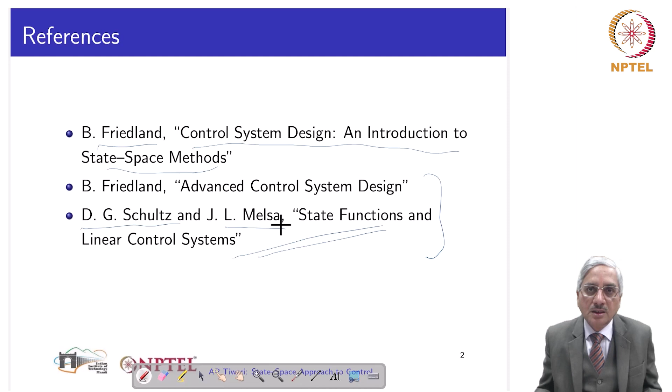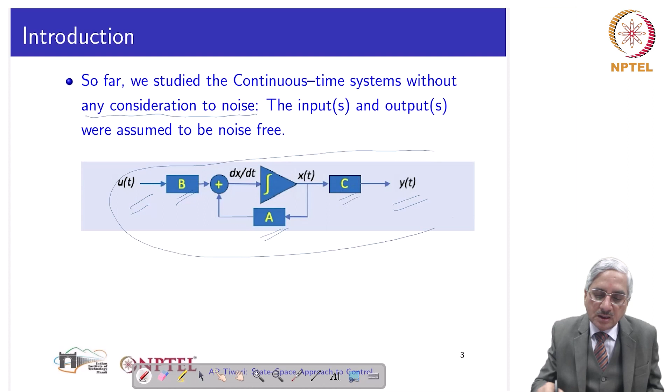So, as I said in the beginning, we studied the continuous time systems so far without any consideration to noise. The inputs which are coming to the system and the outputs which are coming out of the system, both of these were assumed to be noise free. No consideration was given, and even though the matrices A, B, C in the state space model utilize this form, nowhere do we see any noise.

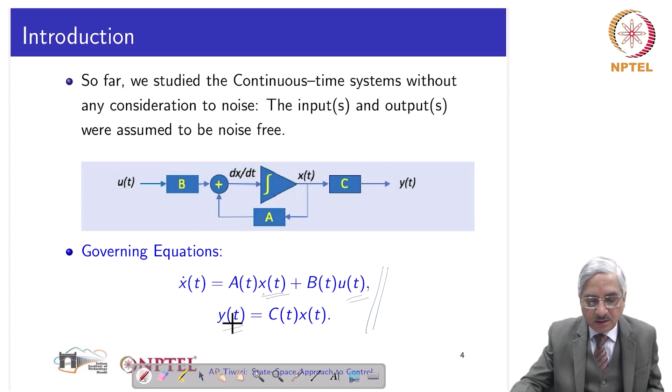And with that, these were the equations we used. So everything is quite deterministic in nature. This system state, system input and system output, they have been studied in a pure noise-free environment.

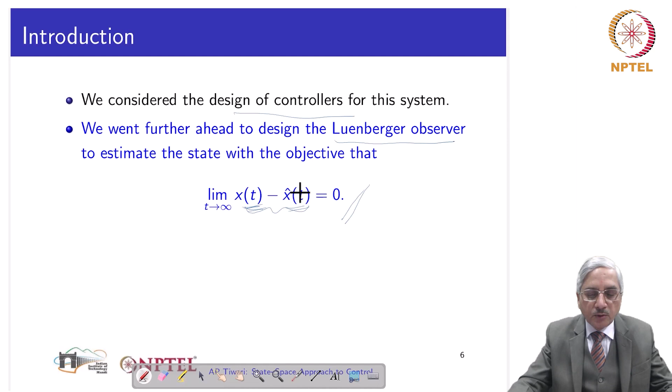We designed controllers, and then somewhere in the design of a state feedback controller, we realized that to implement a state feedback controller, we require states, and not all the states are accessible or they are not measured for reasons of economy, installation, etc. So a respite came that the Luenberger observer is capable of estimating the states, and the objective function in that estimates the states with this objective: that when time t tends to infinity, the deviation of estimated state from the actual state, or this error, will be small. With this objective, we learned the Luenberger observer, and we went on.

We studied the separation principle, which established that when we use the estimated states from the Luenberger observer in place of the actual system states, we get the stability and performance as we would have with actual states, except for some initial time during which the states of the observer converge to the system states. After that, the performance of the system is as good as the performance that would result with the feedback of actual states of the system.

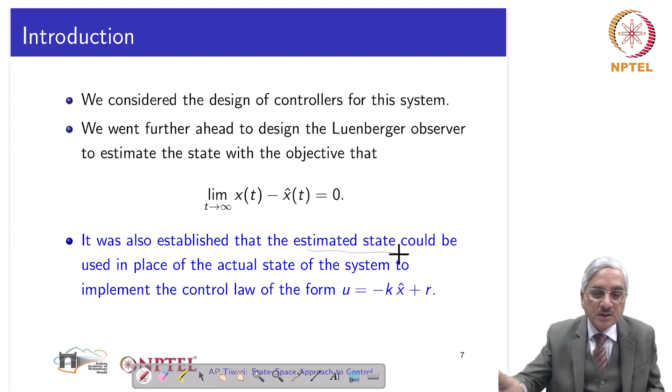Then we also established that the two things, the design of the control and the design of the observer, could be carried out independent of each other, and the overall system with state feedback controller designed separately and observer designed separately, when brought together in realization, would be stable. This is what we established. We utilize that even for Kalman filter.

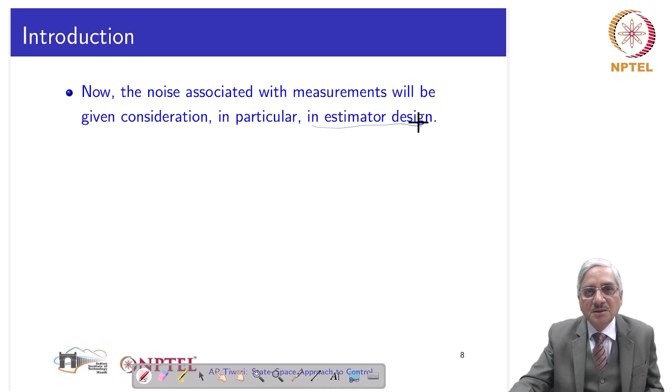Now we are at the point where we actually consider the noise associated with measurements. And here, in the estimator design, of course not in modeling, etc., we are not going back, only in the estimator design. So basically, the design of a state estimator, which we will be learning now, depends upon probabilistic data concerning the noise. Probabilistic data will consist of the average and the covariance, etc.

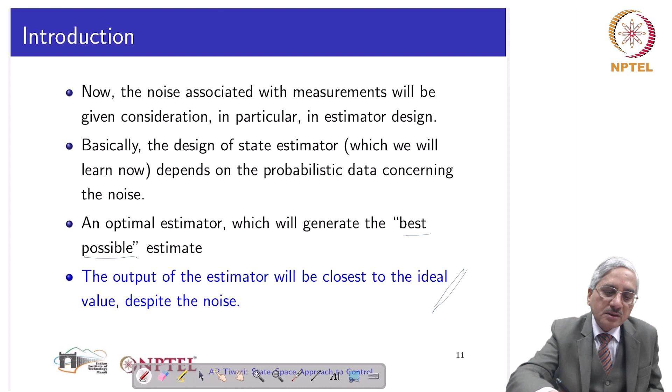And we will design an optimal estimator which will generate the estimate of states that is best possible with the given noise statistics. That is the beauty. And this is the meaning of the best estimate: that the output of the estimator will be closest to the ideal value despite the presence of the noise, despite the noise corrupting the system characteristics.

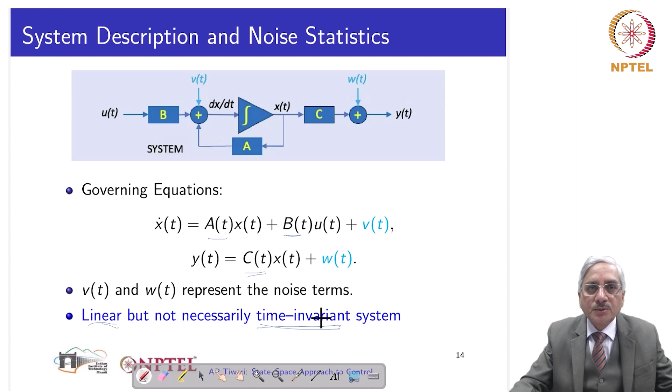Now, first we see whether you call it properties or assumptions. So the noise which we can handle through Kalman filtering should have these properties. First thing is that it should be additive, as I told earlier, both adding one to the input and one to the output. So both are additive in nature, and there are only two forms of noise considered, the Vt and the Wt, the input noise and the output noise.

And the additional property they should have is that both of them are white noise. Now, of course, one should study literature to understand what is white noise, but here is a short explanation: the value of the noise at one time instant is not at all related to the value of the noise at some other time instant. In that sense, it is called white. Generally, if we see over a long time, it will contain almost all frequency components.

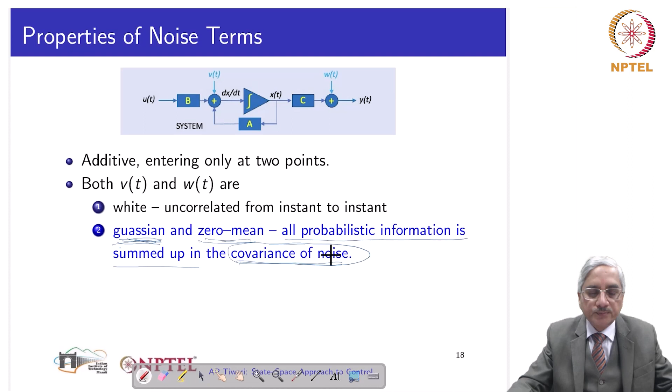The other assumption about both noise terms Vt and Wt is that both of them are Gaussian and zero mean. Now, what this means, especially because of Gaussian, is that all probabilistic information is summed up only in the covariance of the noise. We need not go for higher moments. The covariance, the second order moment, is good enough to characterize the noise. So Vt and Wt, with this assumption that they are Gaussian and zero mean -- zero mean means the average taken over some time will be zero, and Gaussian means the characteristic of the noise is fully represented by its covariance. Mathematically, it is like this: the expectation of Vt into Vt transpose is a Q matrix.

This V is a vector, mind it, because it is entering at input terminals. It has the same dimension as B times U. And U is, let us say, M inputs are there.

This B is multiplying to U, and to that Vt is adding. So it has the same dimension as that of Bu. And Bu is a column vector, so Vt is also a column vector of the same dimension as Bu, which is of the same dimension as Ax, which is of the same dimension as x dot, or n.

So this Vt has dimension n. And so Vt Vt transpose will be a matrix, and its expectation, that covariance, is a matrix Q. And we assume that it is positive semi-definite.

The output noise Wt again has the same size as Cx. It is again a vector of dimension p if the output is p dimensional. So it is a matrix R, and our assumption about this, we'll see subsequently in derivations it will be visible, is that R inverse is to be evaluated, and so R must be positive definite.

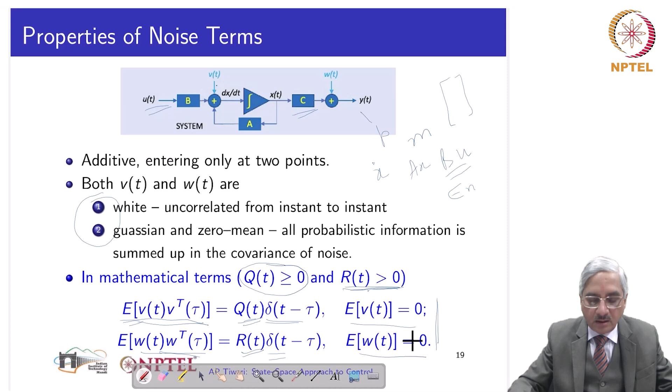So these are the mathematical characterizations of these properties of Vt and Wt. Covariance is Q. They are uncorrelated from time to time, so that is why this delta. They are zero mean, so that is this. Now they are uncorrelated to each other, so this will be zero for all time, t and tau, for any time.

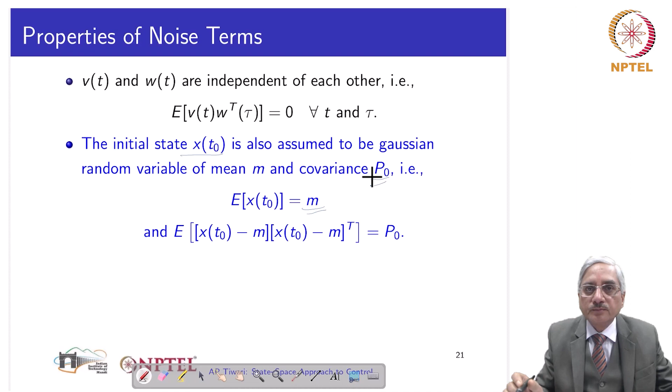And the initial state of the system is assumed to have a mean m and covariance p0. So let us interpret this a bit. So xt0 - now let us first consider a single state variable, which with time will have some, let us say, this kind of variation.

And then we are considering at t0. So at t0, when we do it in the deterministic sense, there is no noise, nothing, then we know the state is here - this is xt0. We are considering one of the states, so let us say xi. Now when we say that it is containing noise and its expectation is m, so of course this is m.

But then what it means is that it could be little more or it could be little less, and this band is something which is very random. However, the mean is here, and around that, its covariance, which is p0.

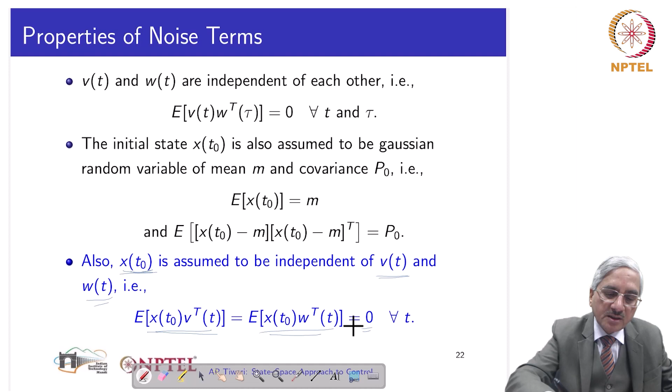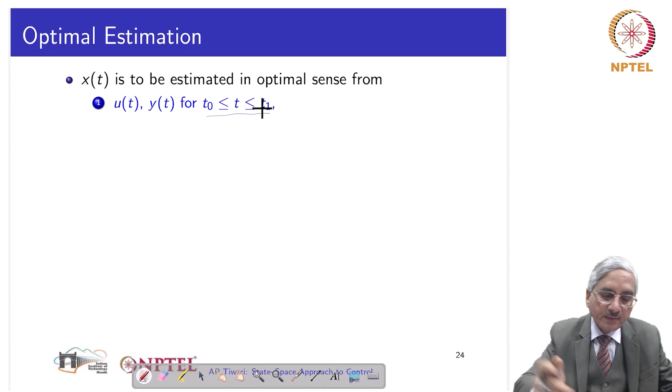Now with that, we state the estimation problem, the optimal estimation problem. So we are given ut and yt from t0 to t1, at all the instants of time between t0 and t1. Ut and yt are continuously given, and we are also given the probabilistic description of xt0, vt and wt - mean and covariance, that Q and R and P matrices - this is given, and the means are assumed to be 0.

Or if they are non-zero they are given. So we have the knowledge of input and output at this time interval, and we have the statistical information, probabilistic description of the initial state, the input noise and the output noise.

And now we first consider the case of an autonomous system, so we are assuming u equal to 0 all the time during this interval. We assume ut to be 0, and we are also assuming that instead of estimating the entire set of state variables x1, x2, etc., we are considering a linear combination of states, a weighted sum of states. So just one quantity we are considering to estimate, which is b transpose xt. b is a vector - we are not first considering the entire state vector xt, we are considering a weighted sum.

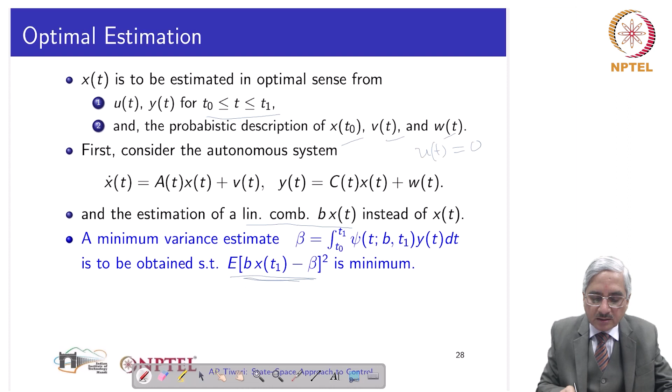And you can see we are assuming that this beta, which is the estimate of bx1 in the optimal sense, is given like this. Now this requires a deep understanding of statistics.

We are taking it as granted that we want to estimate beta, which is a function psi of t given b and given t1, and this beta will be this integral, a function of psi multiplying with y integrated with respect to time over the interval t0 to t1, we will get a beta which is the best estimate, minimum variance estimate of this linear combination.

So this is the starting point, and as I said, this we are taking for granted that it will come in this form. And as we will see, with this we get the solution, we get the result. So it is a good starting point.

In other words, we have to minimize the square of this deviation of bx1 from this integral. This expectation has to be minimized.

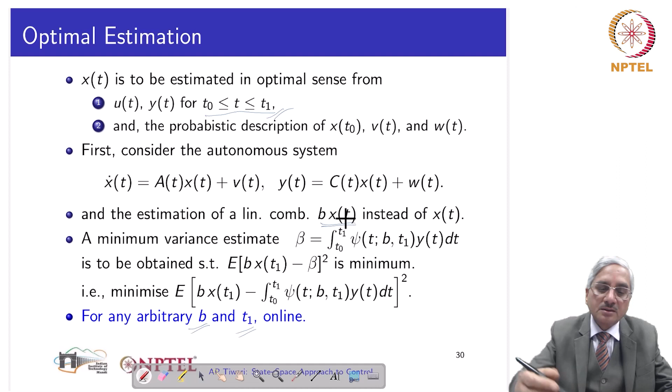Generally in the state equation we give the initial condition. Here we are giving the value at t1, the final time, as B transpose. This is the assumption, and B was that, if you go back, B was here, that linear combination Bxt.

So we are telling that RT is some kind of state. It has the same dimension as x. It is governed by this. The forcing function is C transpose psi transpose. The system matrix is minus A transpose, and the boundary condition is RT1 is B transpose. This I have already said.

Now we consider this product R transpose into X, and we are differentiating it. Why we are doing it will be little clear, but essentially we want to get a linear expression, that integral, that minimum variance, that bxt minus that integral. We want to get one expression for that. With that objective in mind, we are proceeding like this.

We assume this system dynamics, and this state we are multiplying its transpose to state x, and that product we are differentiating with respect to time. So this is very simple. Differentiation of RT-xt is R dot x and R transpose x dot.

And in that, in place of R dot, we make a substitution from here, and x dot, we have assumed autonomous system, so Ax plus Vt only remains. That Bu is not coming because we have assumed ut equal to 0. So we have made these substitutions.

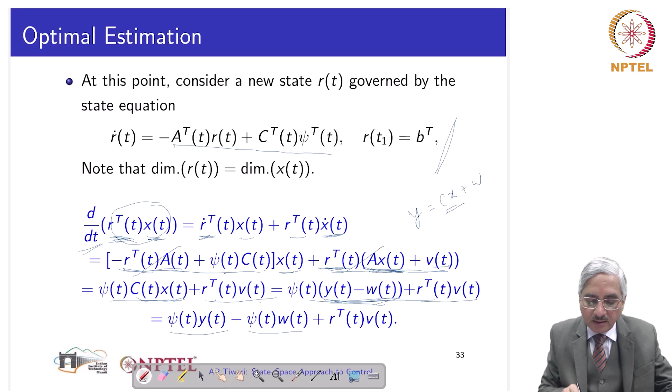And now we open this, so we get psi t yt minus psi t wt plus r transpose v. This is what we get rewritten here.

Now we proceed further. We integrate both the sides, all the terms on both the sides, between these lower and upper limits t0 to t1, and we have the boundary condition r(t1) equal to b transpose. This is the integration of the left hand side, integration of d/dt of r transpose x, and this becomes...

This evaluated at t1, that comes from calculus. Integration of derivative is the expression integrand evaluated at the upper limit of the integral, so we have this, and then this evaluated at the lower limit of the integral, and this r(t)x(t), and r(t0)x(t0) r transpose, so this becomes equal to b x(t1), and this is as it is.

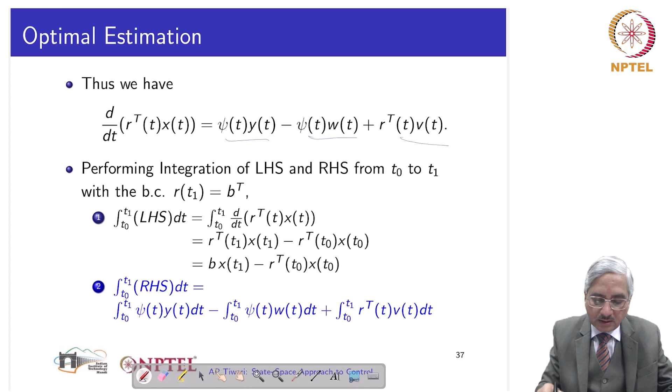So we get that, and the RHS is integral of this, integral of this, integral of this, which is written here, and of course we will consider them, both have to be equated. So this is the integral of the LHS, this is the integral of the RHS, they are equated to each other.

Now what we do is we take this term, psi and y term, to the left, and this one we take to the right, and we rearrange. This we have seen before, our intention was to get something about that only. So we have taken this to the left, and we have this difference, and the remaining three terms are here.

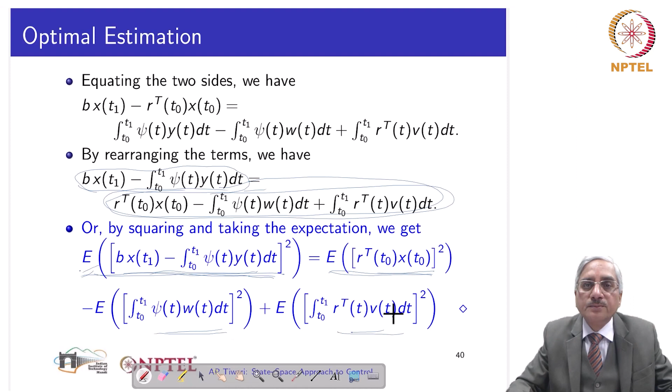Now we square them and we take the expectation. Here there is something we have to accept, and we have to get the explanation by referring to advanced mathematics, statistics, etc. So what we do is we square the left hand side and want to take its expectation, that is fine. But what we have done is this whole thing squared, its expectation we are saying will be equal to expectation of the individual terms squared. This is something we have to supplement by reading further. But here we take it that expectation of left hand side squared is equal to expectation of this squared, which is equal to sum of expectations of individual terms squared. With that we proceed, and we will now evaluate each of them separately.

So the first one is R transpose x(t0). Expectation of its square: this is R transpose x(t0) into transpose of R transpose x(t0), which is x transpose R. Because R is something deterministic, R transpose and R are taken out, and expectation of x(t0) x transpose(t0) is P0, so we make that substitution. So one of the terms becomes this.

The second term: again from mathematics, expectation of the square of this integral is a double integral, expectation of that. So expectation of some integral squared is equal to expectation of the double integral of this integrand and the transpose of the integrand. In that, we see that because psi and w are independent, we take psi out on both sides, and the remaining term is expectation of w w transpose, which is R. This double integral will get changed to a single integral because delta(t minus tau) will exist only at t equal to tau. So we will get this expectation becomes integral of psi R psi transpose with respect to dt.

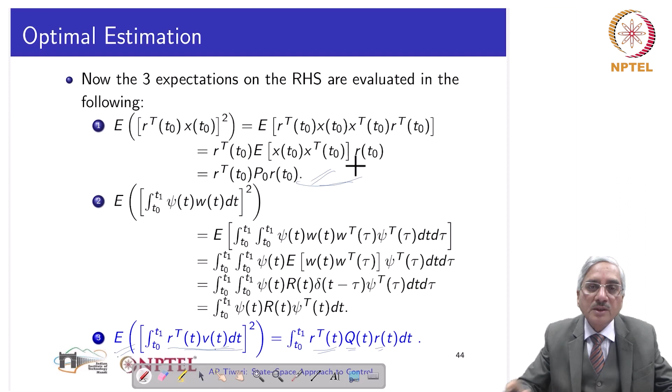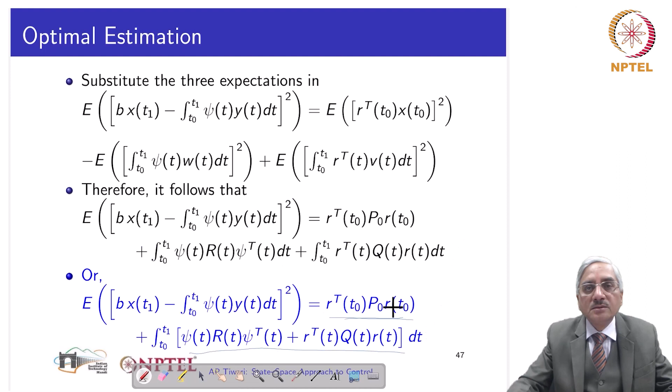So we have now three integrals ready, and the LHS was also integrated. So we rewrite all the things together. This was the expression from where we started, and each one of them we evaluated separately, so we get this one. The left hand side becomes equal to this term plus this term plus this term, and these two are both integrated with respect to dt with the same limits of integration, so they can be combined together, and this term is as it is. This has a lot of resemblance with something seen earlier, which will be shown in the next slide.

But let us recap what we have done so far. We have seen so many complex mathematical equations, some sound and easy to see, some not easy and taken for granted. We have the system description with additive noise. We had the knowledge of covariance Q, R and P0. We assume the state equation like this and a boundary condition like this. We pose the estimation problem as estimating a linear combination of the states at time t1, and we intend finally to say that for any b and for any t1 it should work, and it should work from any t0 to any t1.

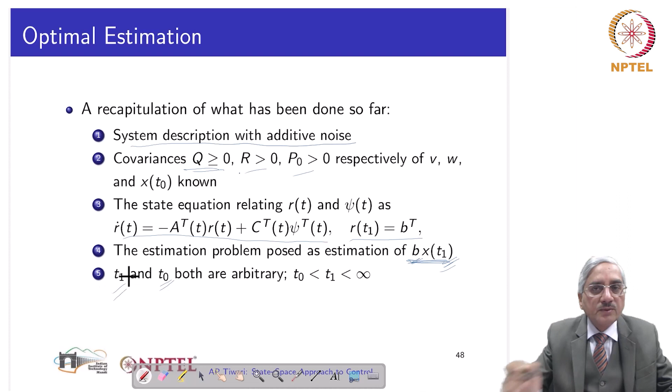With two differences. One difference is that generally this is given in the regulator problem at terminal time. Here it is given at initial time. And other difference is that RT, generally state equation is given with an initial condition. Here it is given as a terminal time, final time t1, a boundary condition is given. So otherwise it is like a regulator problem.

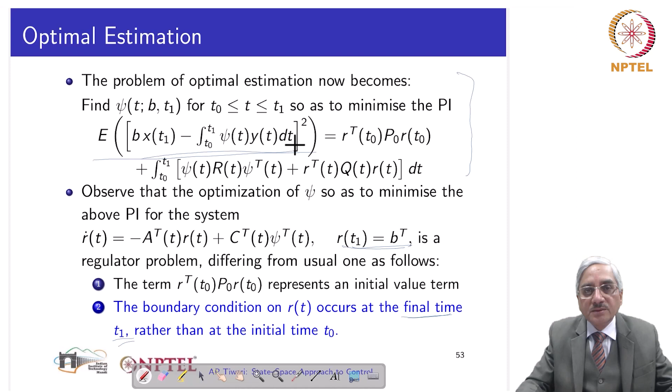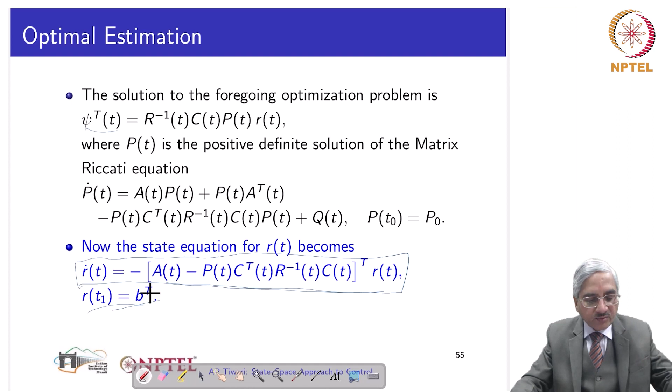For R, and so we have R given by this dynamic equation with this boundary condition rather than the initial condition. We get R given by this, and we can rewrite it by introducing a matrix AE as A minus this, is that psi transpose rather.

So we introduce AE and its state transition matrix we denote by phi E. Then RT will be given by this. This B is the final condition. RT1 was B. So RT is given by this state transition matrix, pre-multiplying that final condition, and psi is given by this. We have substituted R.

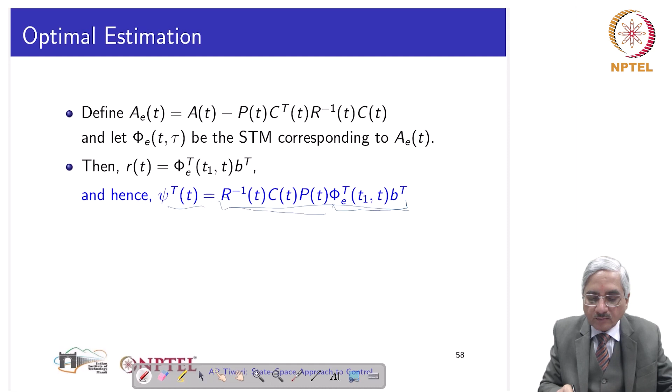Here it was psi. One more. Psi was this, and we substitute R there. So we get this. This is R and this is psi. So we get this for psi, and once psi is known, then we know beta, which can be determined.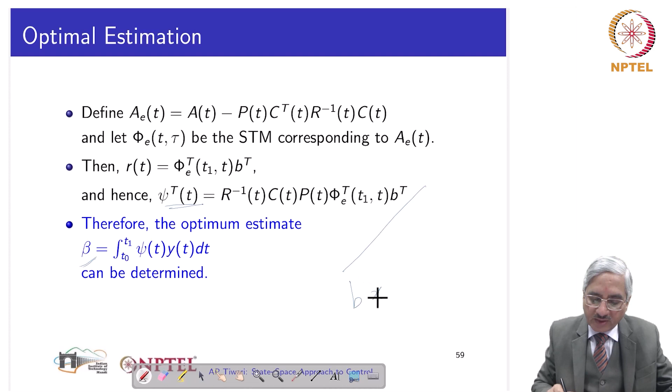So thus we have arrived at some meaningful result, and from that now we want to see how we can estimate all the components of the state vector. So far we concentrated upon Bx at t equal to t1. Now we see how we can estimate all the components of x at t1 or probably at every time t.

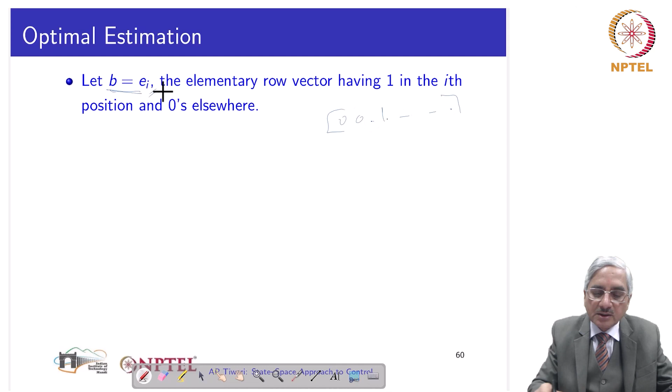So we assume that B is EI. EI is the elementary row vector. So it has all zeros. Somewhere it has 1. So at the ith location it is 1. Remaining all locations it is 0. This is EI.

So in that case Bxt1 will be Xi at t1, because we have, let us say, 3-dimensional 0,0,1 into x1, x2, x3 will give x3. So similarly in a, let us say, 0,1,0,0, 4-dimensional x1, x2, x3, x4, this thing gives x2. So Bxt1 with B as EI is Xi, the ith state.

And that means that Xi at t1 will become this. And substituting for psi, we get this.

And now if we do for different EIs, EI equal E1, E2, etc., we take them together, then we will get the entire X. And that entire X, the estimate of X, we are denoting by XE. XE is estimate of X. It will be given by this. We got this result.

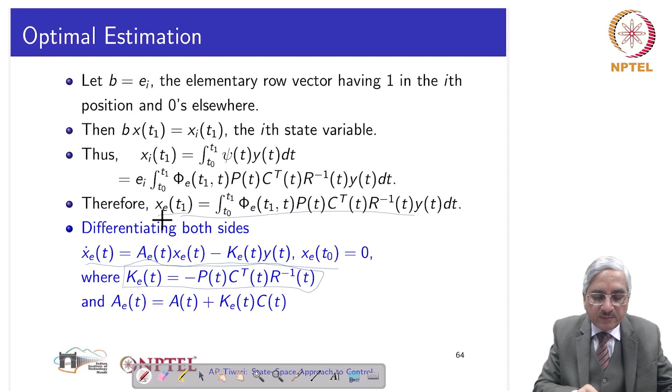Now we have to do so that it becomes recursive, it becomes realizable. So what we do is we differentiate this expression, both the sides, and we get this result with that definition of K, which is given here. This one we are denoting by K, and if we differentiate this, again we have to know a few properties of integral calculus.

That how by differentiating this, of course we will get x dot, differentiation of this, but how from this we get this, where A and phi E, that phi E is the STM corresponding to AE, that we have seen. So from this by differentiation we will come to this, and of course that Kalman gain KE is given by this expression, and AE is the closed loop system matrix with KE and C.

So we got basically a closed loop equation given by this one, and the Kalman gain given by this one, where P is obtained by solving a matrix Riccati equation, as shown in the previous slides, with a known initial condition. That means we can estimate XE by this.

Let us see its resemblance. It is very similar to the observer equation in case of a Luenberger observer. Estimated state is governed by AX plus this. This is a prediction. Of course, we did not yet consider that BU term.

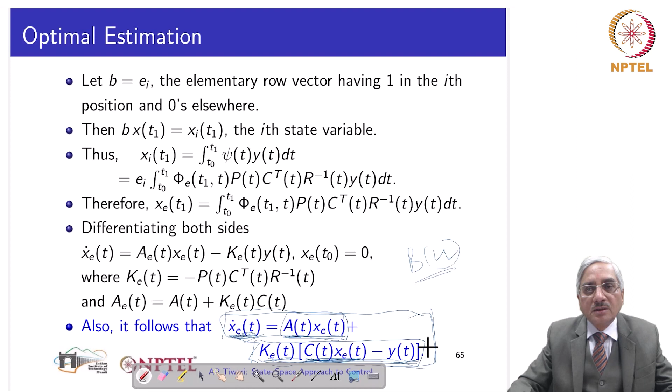Then we will determine Ke once P is known, since C and R are already known. So we will determine the Kalman gain Ke, and then the state of the estimator is given. XE equal to A XE plus Ke into C XE minus Y.

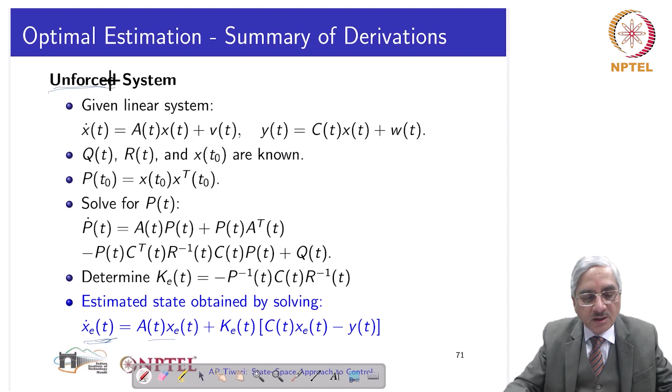So this is the summary of optimal estimation in case of an unforced system. We had assumed that. If we do a similar derivation with Ut not equal to zero, that means the forced system, almost everything remains the same. Only two equations change: one is the state equation characterizing the system.

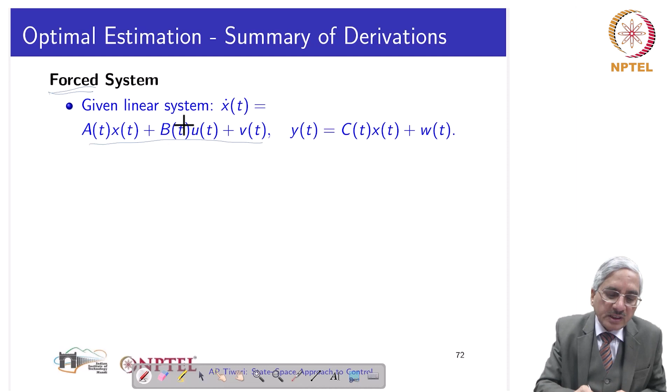So once again, this is the given system, this is the noise, this is the output equation, this is the noise. We know Q and R characterizing the two noise covariances. We know xt0 with some uncertainty or error, so we have Pt0. We solve this Riccati equation given this initial condition. We accept the positive definite solution, and plug that into this to get Ke.

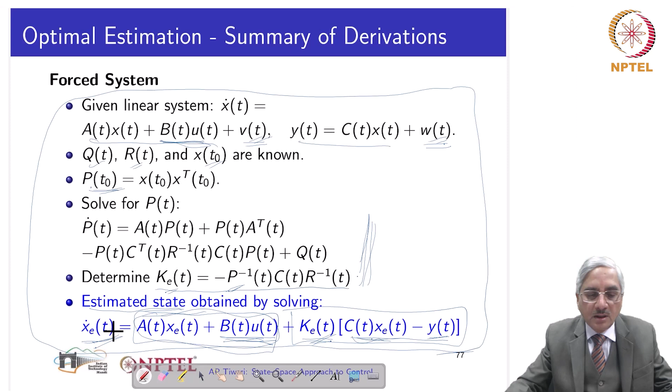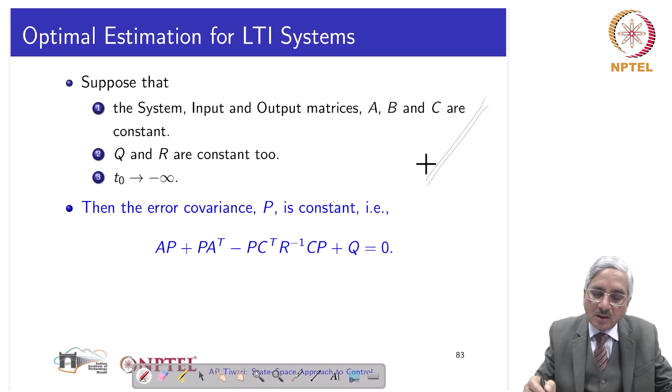So in that case, with A, B, C constant and T0 at infinite time in the past, the matrix Riccati equation reduces to the algebraic Riccati equation, which has a unique solution for P. So we get P, and K relates to P. The Kalman gain can be calculated, which is also constant, so Ke will also be constant. This calculation has to be done only once, and the Kalman filter can be implemented with fixed K, and it will do the estimation even in the presence of noise.

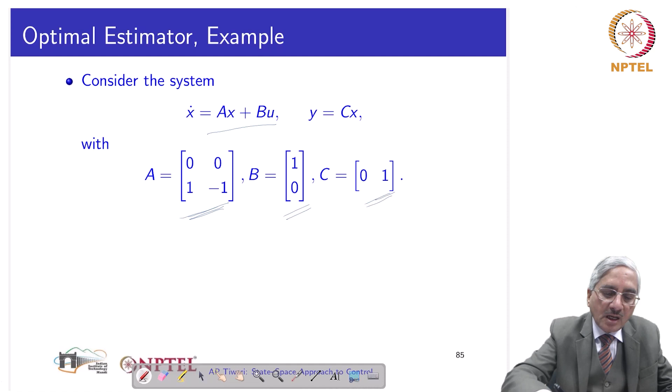Now we consider one example, a second order system given by this state equation. A matrix is this, B matrix is this, and we are measuring the second state, this is the C matrix. We have the knowledge of the noise Vt and Wt. Vt is the additive white noise at the input with covariance Q, and Wt is white noise with covariance R adding at the output. So Q and R are covariances characterizing the noise terms at the input and output respectively.

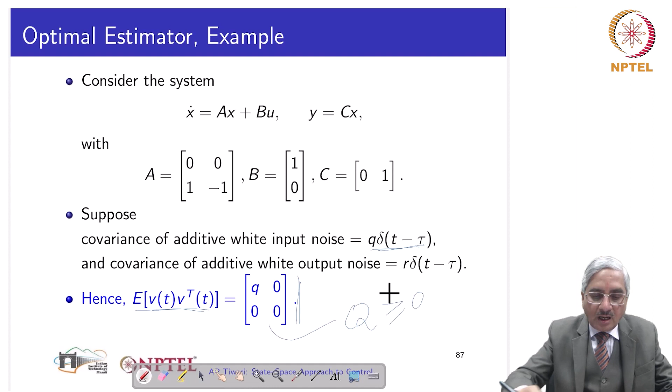With this, we see that E of Vt, V transpose will be this 2 by 2 matrix, and of course this is the Q matrix in our derivations, and we see that it is positive semi-definite. R we are assuming not equal to 0 here, so it is positive definite.

So when we do that: AP plus PA transpose minus PC transpose R inverse CP plus Q is the steady state form of the Riccati equation, or the algebraic Riccati equation.

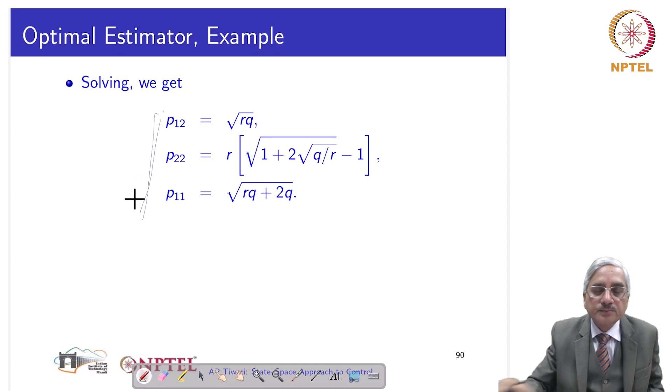And now we get the gain K, which is R inverse C P transpose. This is K, the Kalman gain Ke, and it becomes this.

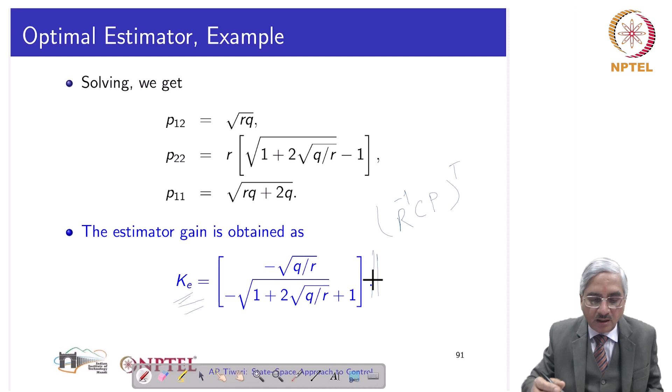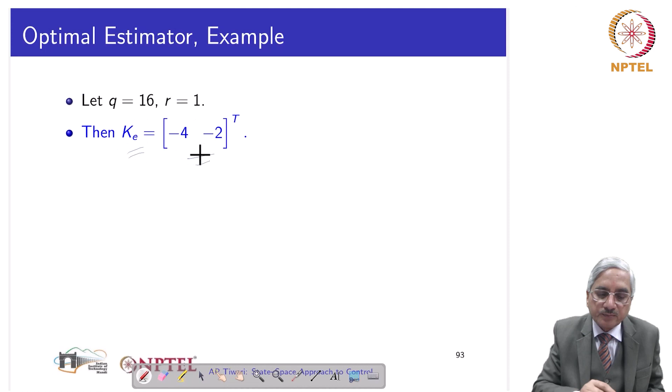We can evaluate this for, let us say, Q equal to 16 and R equal to 1, and then the Kalman gain K becomes this. With that, the closed loop system matrix, A minus KC, becomes this, and we can check that it is stable.

Because this was a linear time invariant system, with noise statistics Q and R constant, we required estimating Ke only once, and that will be applicable throughout for any T. So this K has been estimated optimally. That is the difference from the Luenberger observer: there, K was designed to stabilize the observer; here, K is designed to minimize the state estimation error squared. And it will lead to a stable system also—that is proved in the literature.

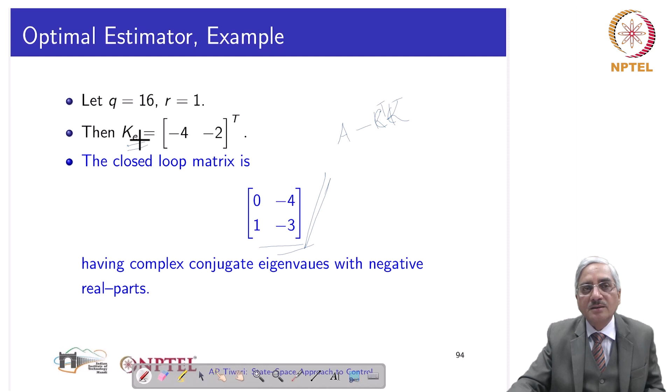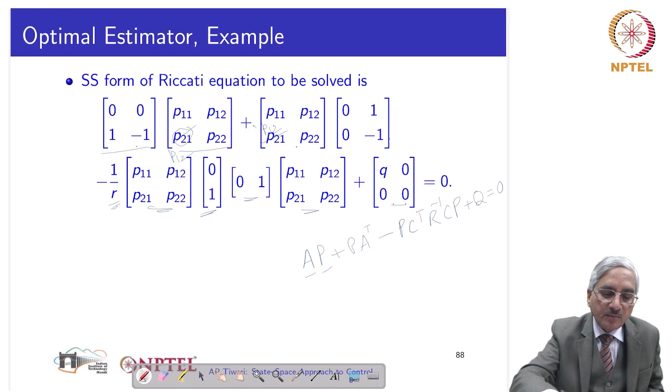So with that, we come to the end of this lecture. There is no specific summary given here. Only thing I want to tell is that despite the derivations being very complicated, despite many things not understood, what remains the reality is that the Kalman filter applies in so many areas. It has tremendous applications, numerous applications, and gives the estimate of state in noisy situations, and sometimes even with uncertainty in matrices A, B and C. It generates the best possible estimate. That is the reason it has so much popularity, so much utility, and so many applications in various scenarios—in the nuclear industry, in chemical industry, in aviation, in defense applications. Everywhere one will find a Kalman filter.